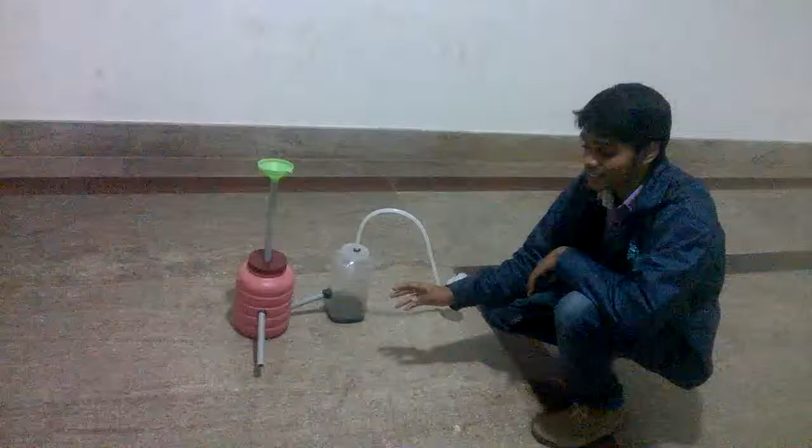But by combining a biogas power plant with a combined heat and power plant, the overall efficiency of the plant can be increased, and we can get more out of the digester. It consists of two tanks: one is the digester tank. That red one indicates the digester tank, and the other one is the gas holder tank. You can see this white one, it is a gas holder tank.

The digester tank consists of two holes. From the top one, we are feeding the bio waste. That may be food or wasted vegetables or cow dung, sheep dung, like that. Any waste matter can be inserted into the biogas digester from the top.

And the biogas digester is also provided with an output. It would be useful to send out the slurry, which may be called a digestate. That is the final product in a digester tank. The digester tank is connected to the gas holder tank.

After 1 or 2 days, a mixture of methane and CO2 gas will be produced in the digester tank, and that gas will be transferred to this gas holder tank. In the gas holder tank, we provided an outlet pipe. Through this pipe, the gas is connected to a Bunsen burner. By adjusting these screws, we can increase the amount of biogas flowing into the burner, and the heat produced by the burner can be adjusted by simply adjusting this T-nipple joint.

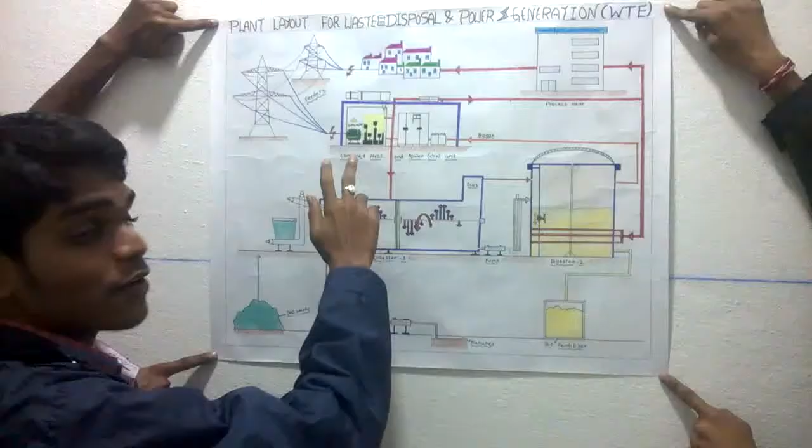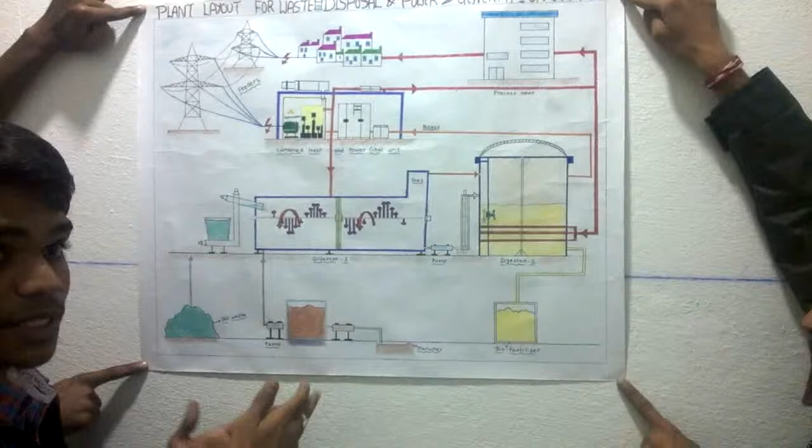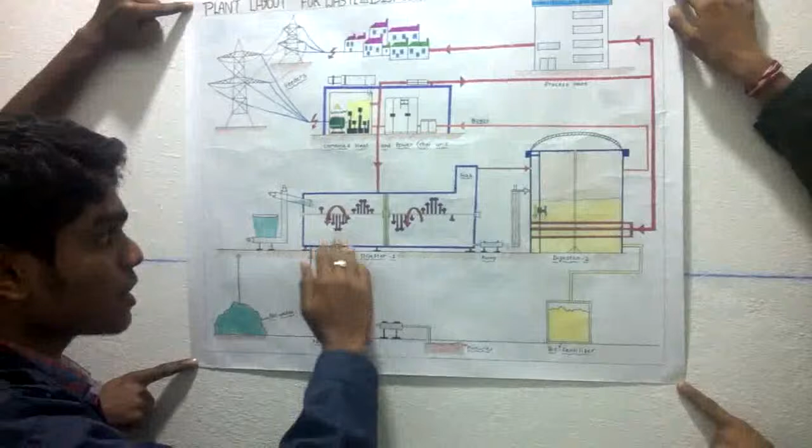For the waste disposal and power generation, there is the waste to energy converter. That is the full form of WTE. It consists mainly of parts like digester tank 1, digester tank 2, a pump, and a combined heat and power generation unit. What exactly happens in this plant is, firstly the bio waste is fed into digester tank 1 and mixed with a certain amount of water. The water and the bio waste should be in equal proportion, and the process can be controlled by means of these mixers.

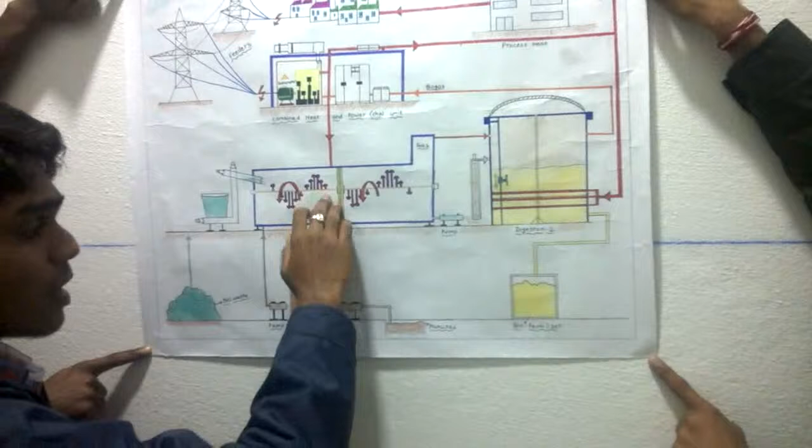They will make the process occur in a faster manner, and the biogas is produced at this top corner, and it will be transferred to digester tank 2, and from here the anaerobic digestion occurs. Anaerobic digestion means splitting up of a complex compound into simple molecules in the absence of oxygen by bacteria called methanogens, and the complex matter, which is converted into minute particles, is pumped into this digester tank two, and this is called slurry.

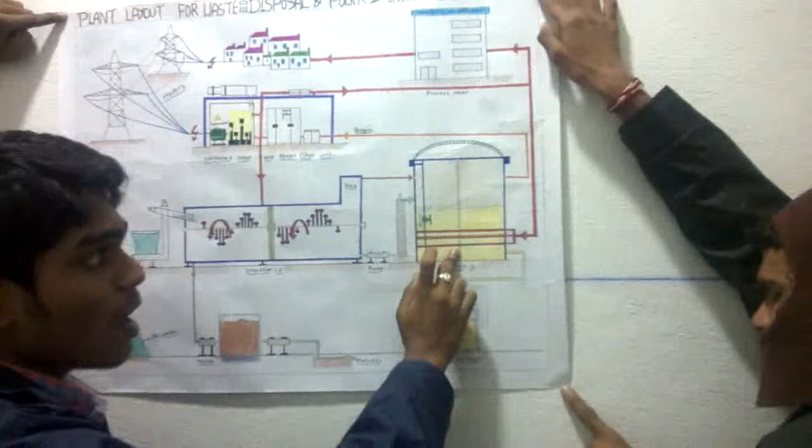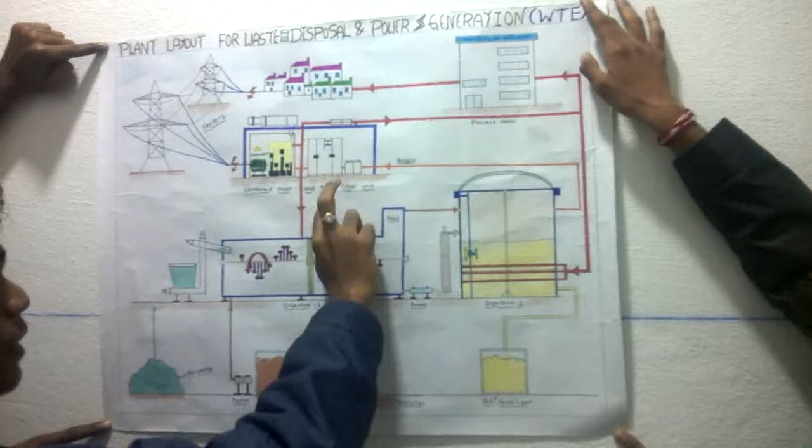The slurry is sent out, and it can be used as a biofertilizer. It has rich nutrient values. You can see here, manures can also be fed into this digester tank. After this, whatever biogas is available here is transferred to the combined heat and power unit. Here, water is heated and converted into steam, which is passed over the turbines, and these turbines are used to run the electrical generators, and the electrical generator produces electricity, and it is given to the feeders.

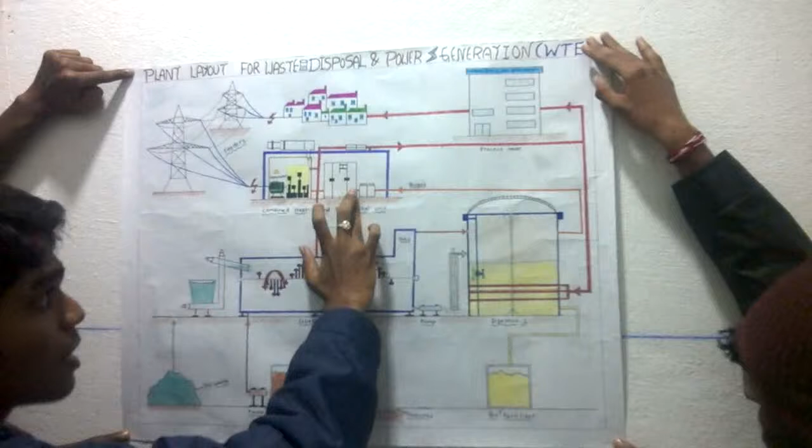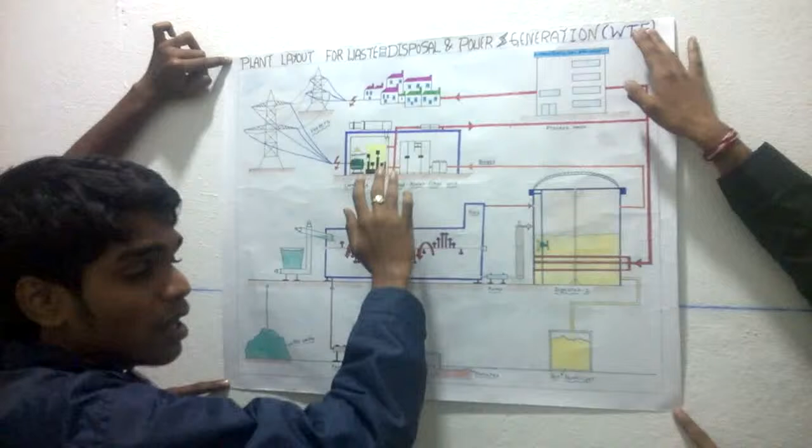In a conventional thermal power plant, the heat produced will be wasted, but in the case of the combined heat and power unit, the heat produced will be used to support the process of anaerobic digestion, because this anaerobic digestion occurs at a temperature of 35 degrees centigrade, and the remaining heat is sent for home heating and other heating purposes of the boilers. In this manner, we can increase the overall efficiency when compared to thermal or nuclear power plants.

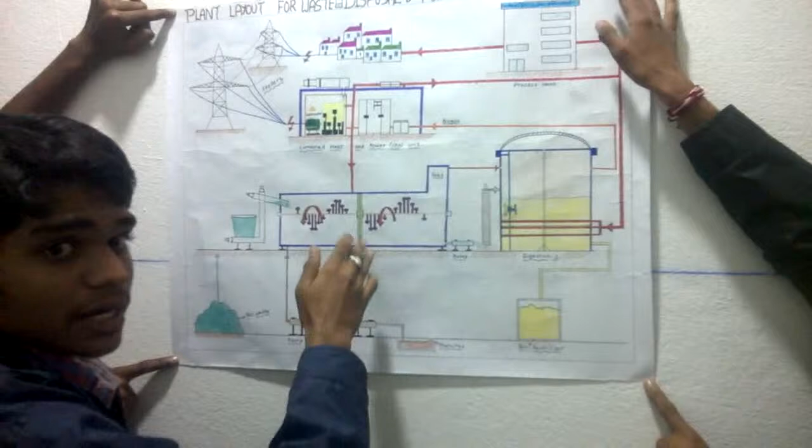The efficiency of this combined heat and power plant, coupled with the biogas generator tank, is more. That is the main theme of our project. It is to increase the electricity generation with waste disposal. That is the main objective.